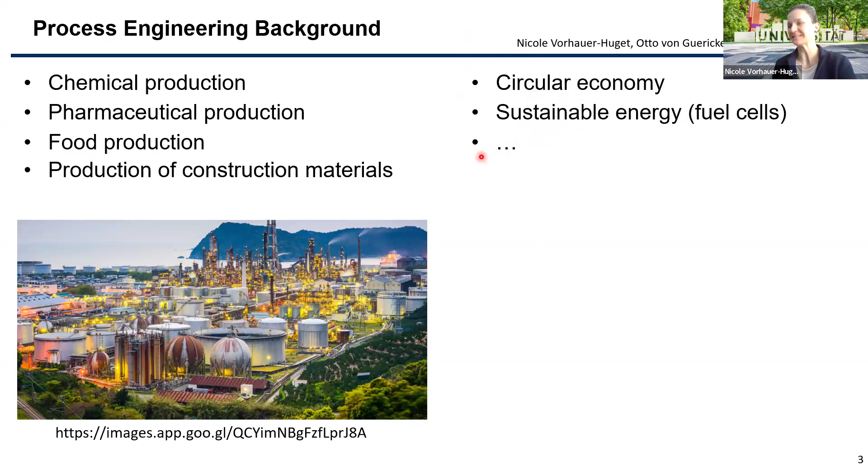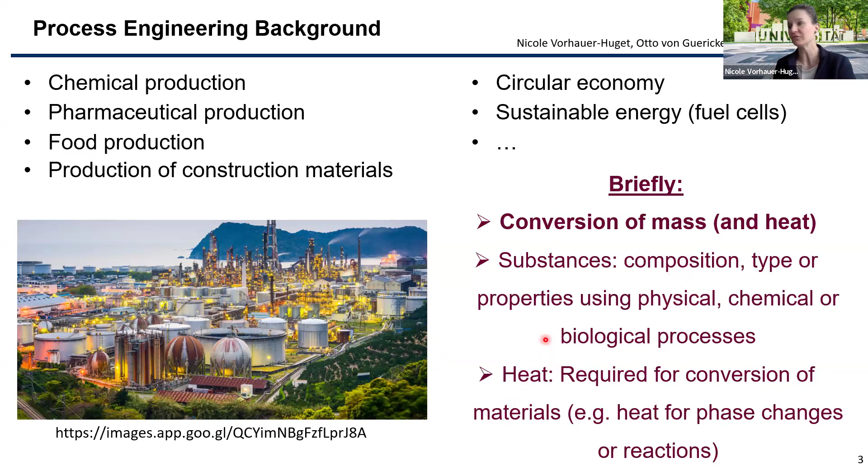One could briefly say that process engineering is actually the conversion of mass and heat. This means the substances, their composition, their type, their properties, is converted from one type into another type by physical, chemical, or even biological processes. And the heat is also converted, because usually we convert the heat into a chemical reaction or a phase change or something different. So this is process engineering - not that bad to learn it within a few minutes, I would say.

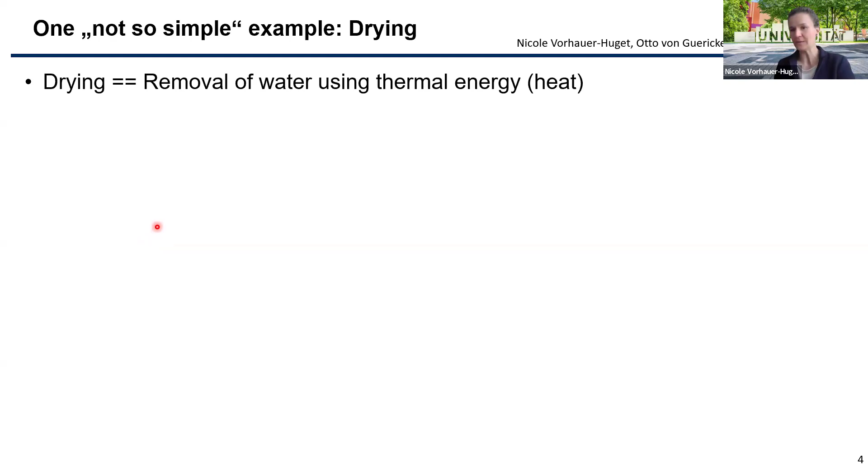Maybe to give you an example, which looks very simple at first sight but is maybe not so simple if you look a little deeper into it, is drying. Drying is the removal of water using thermal energy, using heat, and is something we experience daily - for example in the morning when we blow our hair to get it dry after a shower. This is the drying process, and here we use hot air to evaporate the water and transport it from the hair in vapor form to the environment.

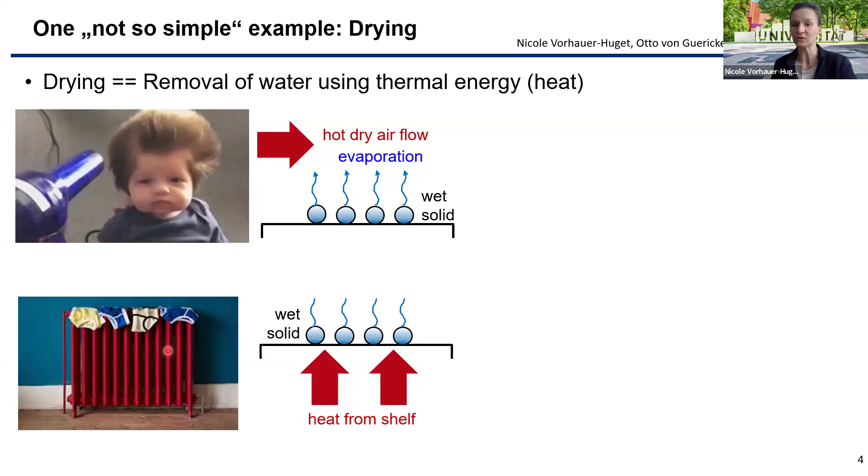And there's also drying, for example, of clothes - it's a little bit different heat supply. So when we use hot air with the hair blower, in the other case it's a hot shelf that transfers the heat to the wet solid for evaporation. So the conversion here is the phase change of water from liquid to vapor. I think this is easy to understand. The heat transfer here is by hot air or contact to a hot shelf to the wet solid, and the mass transfer is the transfer of the evaporated water into the surrounding.

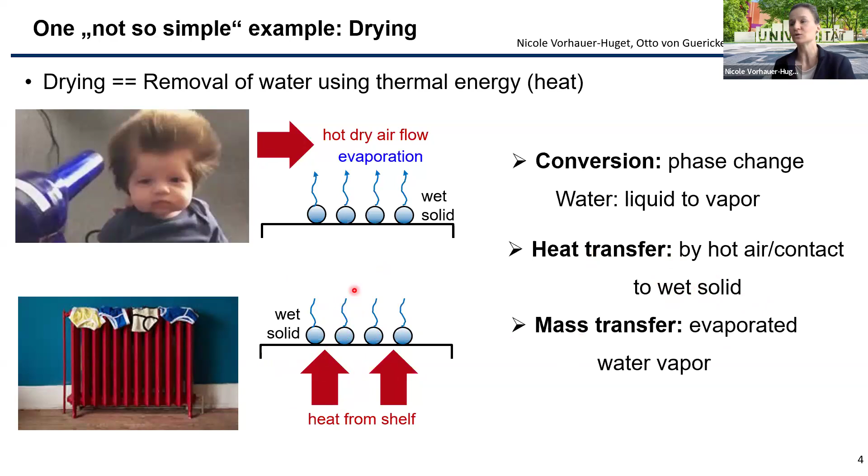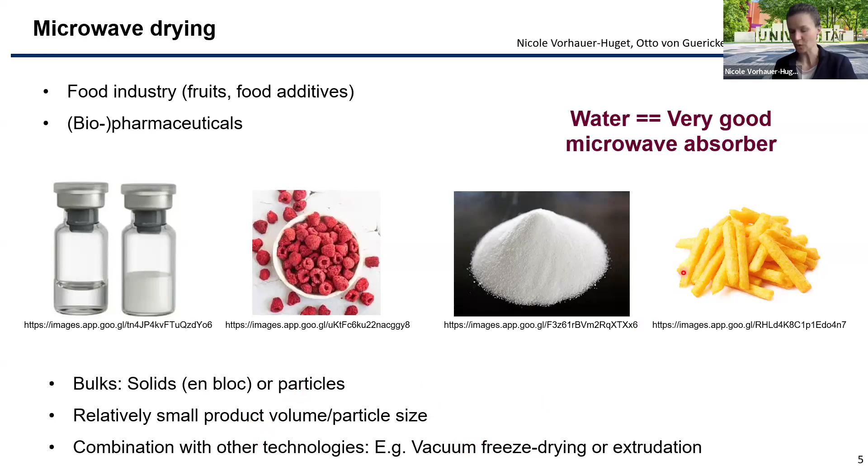So they can either be bulks - for example here in microwave freeze drying, the solids would be frozen en bloc. But it can also be particles that are treated - we can have relatively small product and particle size as the powder we see here, or we can even have a combination of this microwave drying technology with other technologies, for example in vacuum freeze drying, or in the extrudation process, microwaves could also be included to enhance the process.

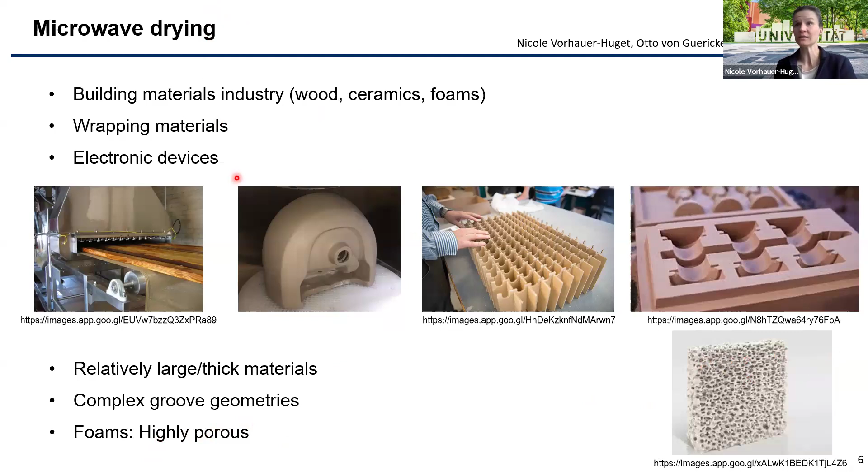So there are quite a lot of applications for microwave drying. Why is it so interesting to do research on that? If there are already industrial processes established, why are we nowadays looking that much at the application of microwaves? This has something to do with the European Green Deal, which has the high goal to achieve GHG neutrality in 2050. In Germany, we even put the goal to achieve this in 2045, and Bavaria in Germany even 5 years earlier. So this is very tough. For this, we need, of course, new technologies and new production pathways.

We can use renewable energy sources because it's actually an electrified process. This can decarbonize the energy supply. Due to the volumetric heating, we achieve a higher energy efficiency. This is what we understand as process intensification. There are other things that are even important, like better process control, different process conditions, tailored product properties. So this is motivating our research at the moment.

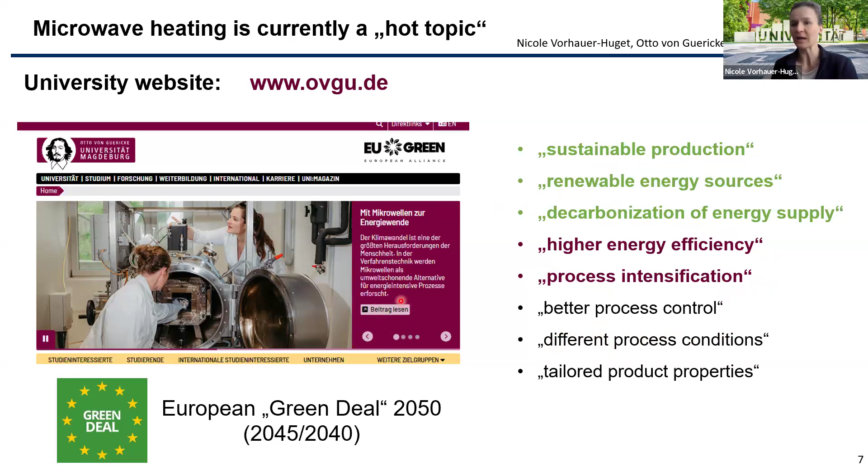Before we go into this research topic, to give you a broader understanding from the process engineering point of view, I would like to give some introduction to what is defossilization, what is decarbonization, and how microwaves are supporting the goals of the European EU Green Deal.

In the chemical industry, when we talk about defossilization or decarbonization, we usually talk about the material aspect. We would like to remove all the carbons, maybe the fossil-based products, and replace them with new sustainable products, maybe even recycled in the circular economy. But for microwave heating, I'm talking today about the substitution of energy carriers for process heat. This means that all the processes in process engineering applications, chemical production, and so on, need heat for the mass conversion. This heat is currently provided based on fossil fuels, but it could be based on electrified processes, and microwaves could be one option here.

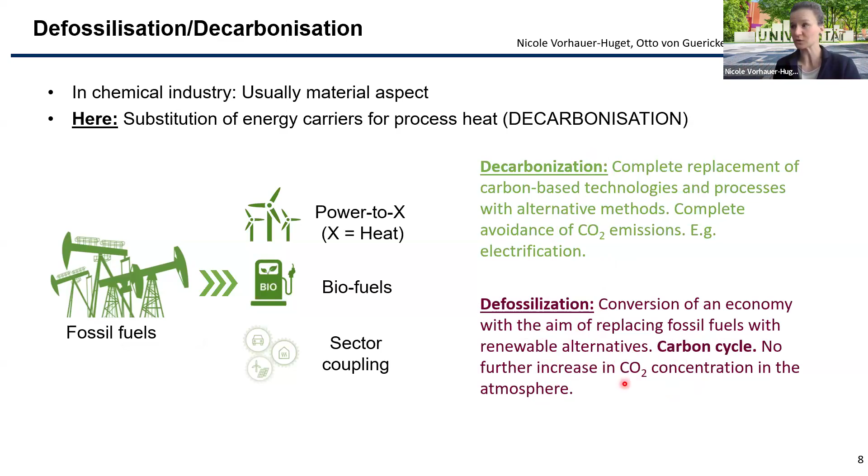To give the definitions here, decarbonization means we get rid of all of the carbons, all of the Cs, CO2, CO, and so on, out of the process. For heat supply, I think this is pretty much realistic, meaning we don't burn any fossil fuels anymore, and we base the heat supply completely on renewable or electrified energy sources. Defossilization, in contrast, means that we cannot remove the C from the processes. There's always some carbon. Many products in chemical engineering are based on carbon, but we recycle the carbon so that the CO2 concentration in the atmosphere is not further increased.

Energy is a very important topic. In Germany, at least in 2020, 19% of the total energy consumption was used for process heat. You can see here the industrial sector and the process heat—440 terawatt hours in 2020. By that time, there was only a very tiny part based on renewable energy sources, this green part here, and some part was based on electricity, but that electricity was not generated by renewable sources. So this is a very huge amount compared to the overall energy consumption in Germany.

When you look a little closer, you can see that most of the energy is used for processes above 400 degrees Celsius, so high temperature processes, but the processes at lower temperatures also have quite significant energy consumption. When I come back to drying, which takes place below 100 degrees Celsius, this is almost a quarter of the circle. So it's quite important to look at this energy consumption.

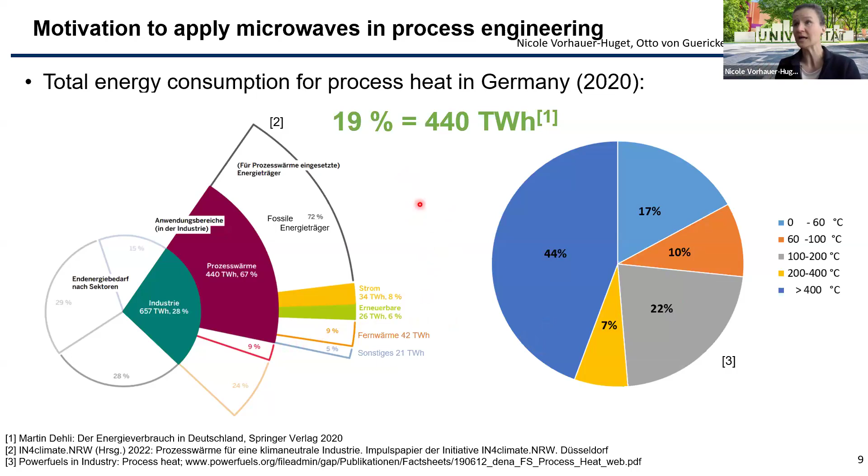If we are thinking about electrification of process engineering, and if we are thinking about GHG neutrality, then we cannot achieve this when the energy consumption increases. So what we have to do in parallel to the replacement of fossil fuel-based process engineering is to decrease significantly this energy consumption.

In Germany, there is the DECHEMA. It's quite a big organization for the chemical industry, and they have written a roadmap for 2050 because of the European Green Deal. They make some suggestions on how to reduce this energy consumption. Some suggestions I would like to read out here.

For example, it would be possible to substitute state-of-the-art processes by other approaches that are less energy intensive. Reduction of temperature levels would be one option where it is possible, though not always. The avoidance of heat loss through insulation - this is somehow obvious and is done where appropriate. The waste heat cascade utilization so that we also avoid too much heat losses along the process chain, or heat pumps, are other examples.

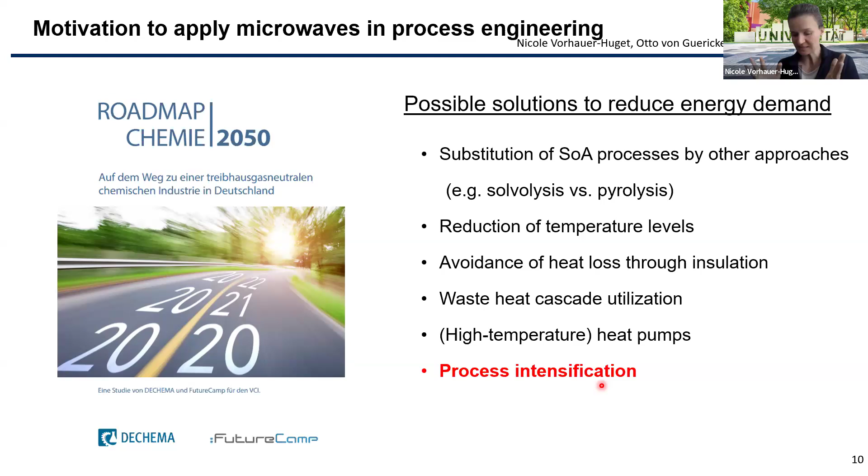One point I would like to highlight today is process intensification - making processes much faster with much higher throughput so that the energy required per kilogram of produced material is significantly reduced. For this process intensification, based on electrified technologies, there are 3 options mentioned in this roadmap because they are electrifiable.

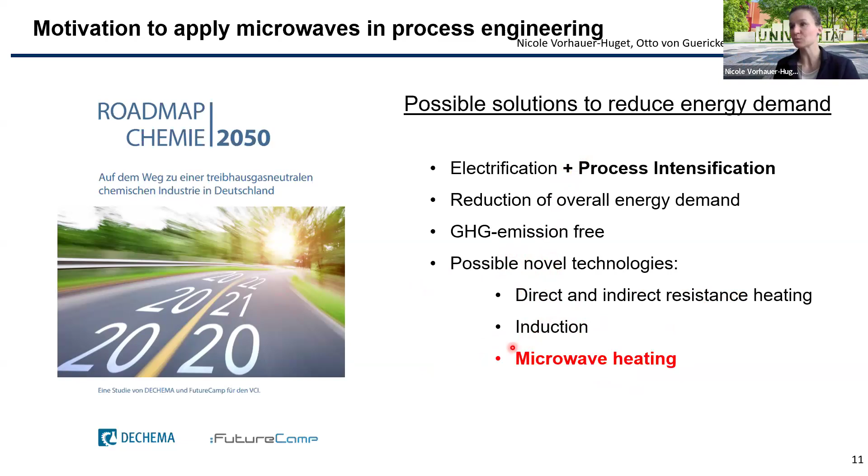This is direct and indirect resistance, so that means ohmic heating. This is induction, and this is microwave heating. I would like to focus today only on microwave heating for obvious reasons.

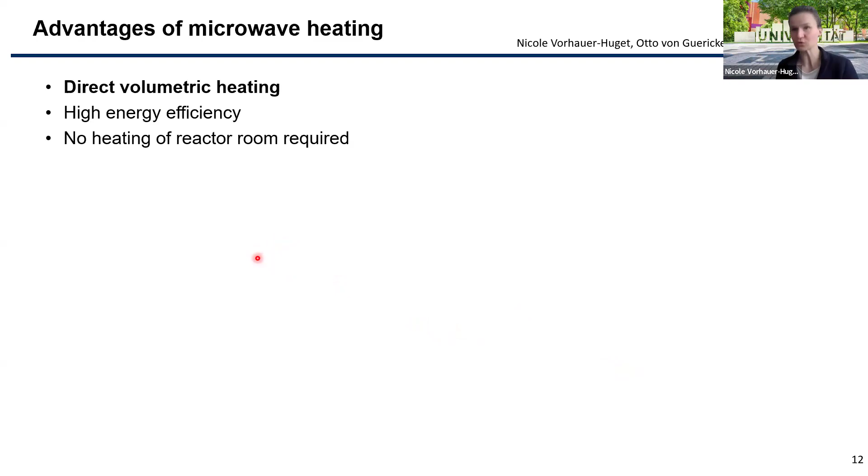What are the advantages of microwave heating? I think most of you know, but let me go through that quickly. You have the possibility for direct volumetric heating. Based on that, there's at least expected high energy efficiency, and only the product is heated - the reactor room or everything around it does not have to be heated. It has very high heating rates if the material allows that, meaning we can achieve reduced process time and high material flow rates.

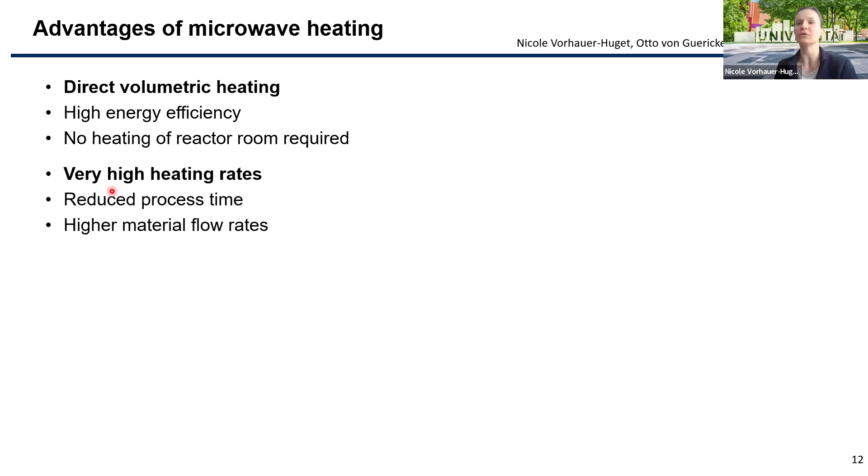For chemical engineering applications, it's also interesting that the temperature gradients are inversed. From home, you know if you heat something in the oven, heat is transported from outside to inside, so the temperature gradient is from hot surface to cold core, at least at the beginning. In microwave heating, it's the other way around - a hot core and a cold surface. This means reaction products produced inside a material undergoing a chemical reaction are transported in the opposite direction to the temperature gradient than in conventional processes.

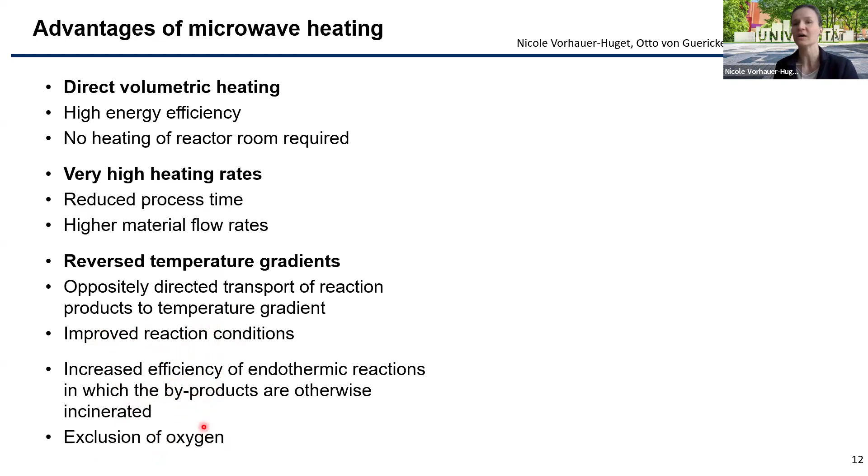This can result in improved reaction conditions. Also endothermic reactions in which byproducts are otherwise burned can achieve higher efficiency because the burning would not be necessary anymore. This would also mean we don't need oxygen in the process, which can have significant advantages for certain processes. I have put here some examples.

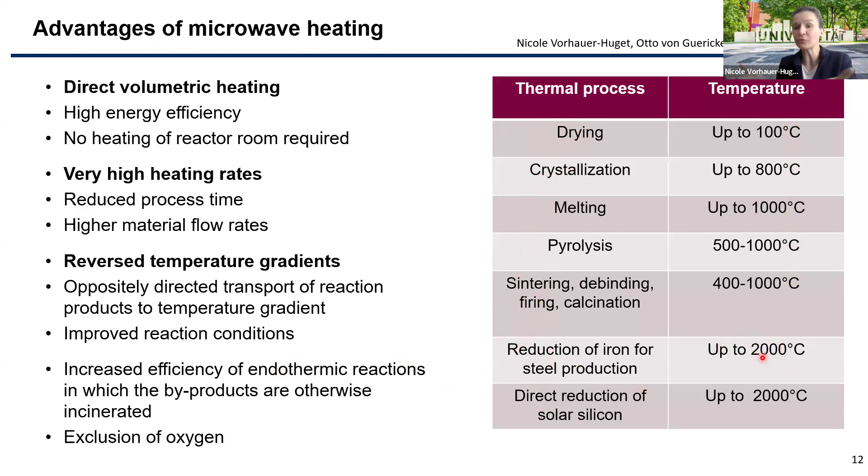For processes in which microwave heating can be applied, other than drying - about which we have talked already - other applications would be crystallization, melting, pyrolysis, sintering, reduction of iron, or the direct reduction of solar silicon. As you can see, the temperature levels at which microwave heating can be applied cover the full range of levels that I had shown you before, which is quite interesting.

But every process that has a list of advantages can also come along with a list of disadvantages. This is clear. For microwave heating, the disadvantages are the dependence of the heating efficiency and heating rates on the so-called loss factor of the material. This limits microwave heating for certain materials - for example, the pyrolysis of plastic with microwaves would be problematic, and very often susceptors would be required.

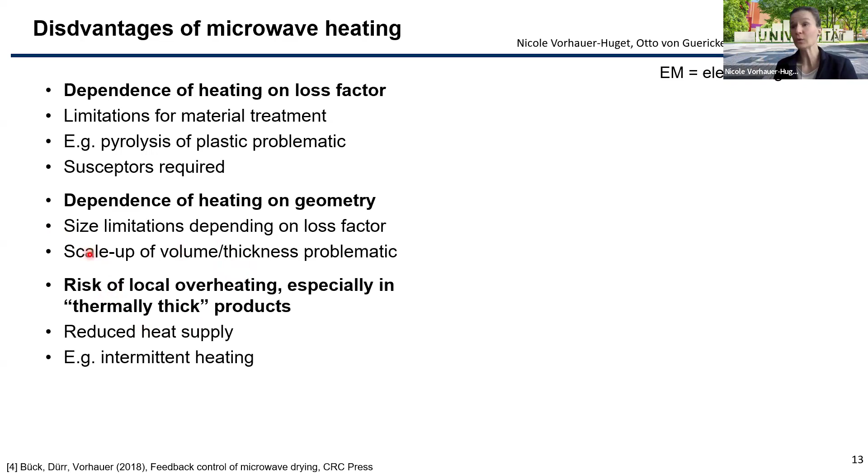The dependence of heating on the geometry is something I would like to point out clearly today - I will show you some examples. This can, of course, also lead to size limitations, and the scale-up, meaning increasing the product size from something small to something big, can be problematic. The risk of local overheating, especially in thermally thick products, is a big disadvantage.

I've brought here some image - this is a clay sample, and you can see the brighter parts in the center. They are dry, so there's no water anymore. The darker parts still contain water, and obviously there was local overheating because we have evaporated the water or pushed it out from these spots.

While the other parts remained wet, and this is of course a problem in process control. The temperature gradients are reversed—they're high in the center, and if the heat transfer is limited, this can be very problematic. Of course, the leakage of any EM field is also problematic, so the reactor design must take this into account.

This means from the process engineering point of view, it is not at all possible to use the apparatuses that are currently established and just equip them with a solid state generator or magnetron or whatever. It means that the complete design of the reactor needs to be renewed.

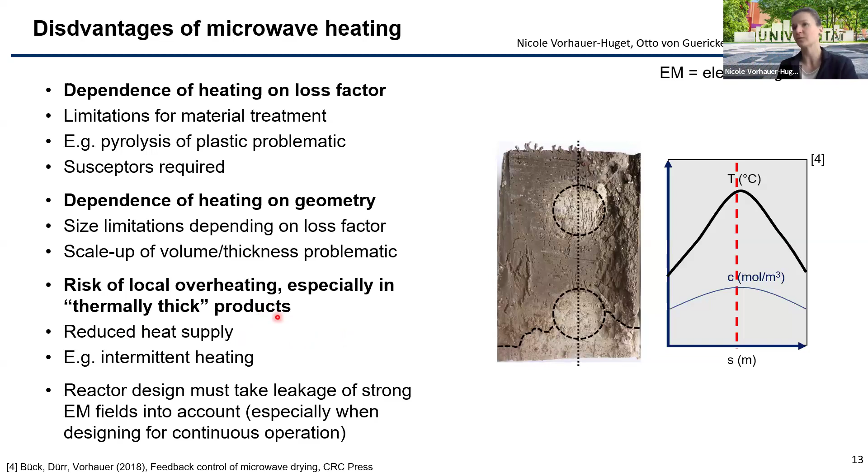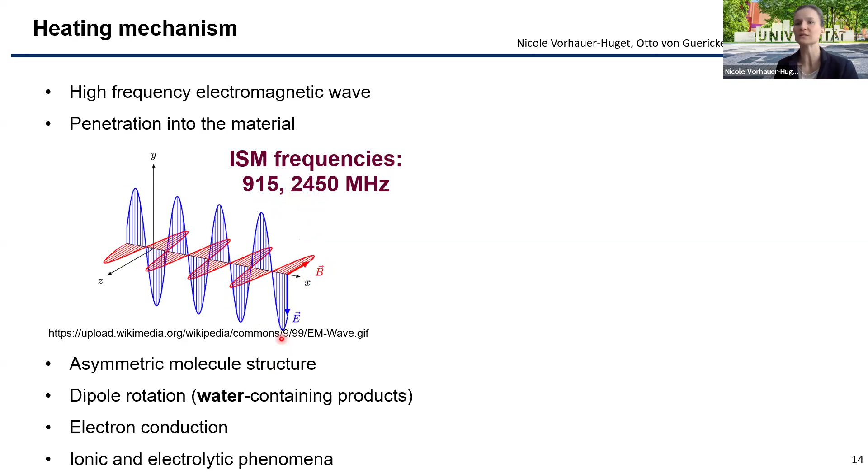Microwaves are high-frequency electromagnetic waves. What is interesting for the talk today is that we use only ISM frequencies, so industry, science, and medical frequencies, at 915 and 2450 megahertz in Germany. These are the allowed frequencies for processes. And of course, the heating is based, for water for example, on the asymmetric molecule structure.

So for the orientation polarization of the dipole, the dipole rotation of water, which is quite interesting for water-containing products, as for example in drying. It can also be based on electron conduction or on ionic polarization.

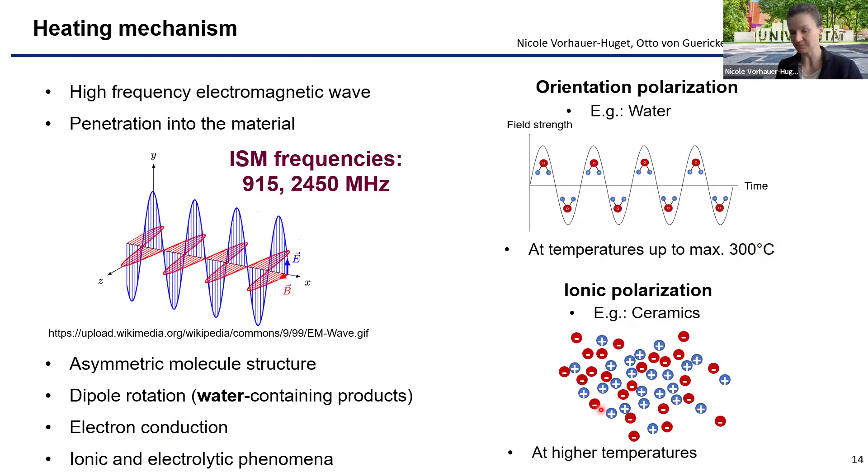Drying takes place usually at temperatures well below 300 degrees Celsius, so water is evaporated into vapor phase at this temperature. At higher temperatures, for example for ceramics, other processes start to play a role, and electronic conduction maybe. If we think about carbonization, for example, that can be done even at much higher temperatures. We will see later.

I would like to give you a very short introduction to the heat transfer condition, because this is important for understanding. In the conventional heating process, as realized in an oven operated with hot gas, we have heat transfer from the center of the hot gas to the surface of the solid. Then there is heat conduction, thermal conduction from the surface of the solid into the core of the solid, where the reaction, phase change, or whatever can take place.

We can calculate the transferred amount of energy with a very simple equation. K in this means the heat transfer coefficient, A is the surface area, and delta T is the temperature gradient between the hot side and the cold side, or between the hot spot and the cold spot.

As we have here a parallel or a series connection of heat transfer resistances, the K is also combined of the thermal conductivity in the gas phase, the heat transfer coefficient in the gas phase, and the thermal conductivity lambda in the solid.

What is important to understand is that the heat transfer coefficient alpha—coming back to this picture of hot gas drying—depends on the geometry of the material and the flow conditions of the hot air. The thermal conductivity lambda depends on the material property, the internal or intrinsic property of the material where we would like to conduct the heat.

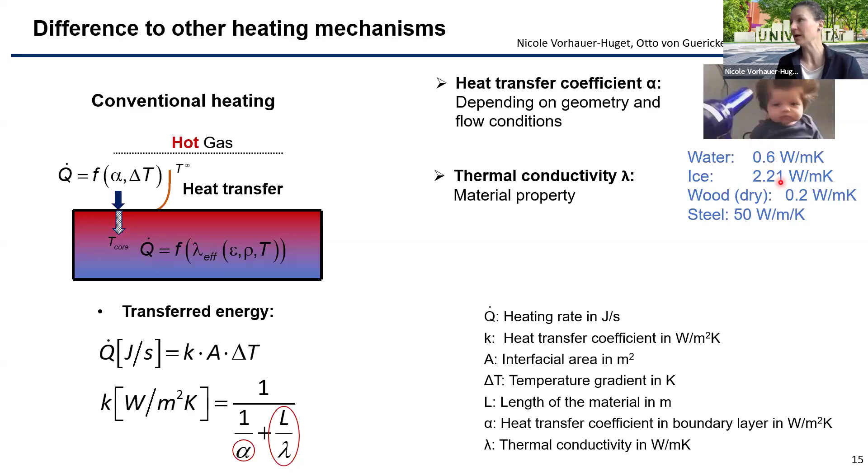There are big differences depending on the material. Water conducts heat not so well, while steel conducts heat very well. Additionally, the thickness of the material plays a role—the thicker it gets, the longer I need to transfer the heat from the surface to the center, so the drying time or heating up time will become longer.

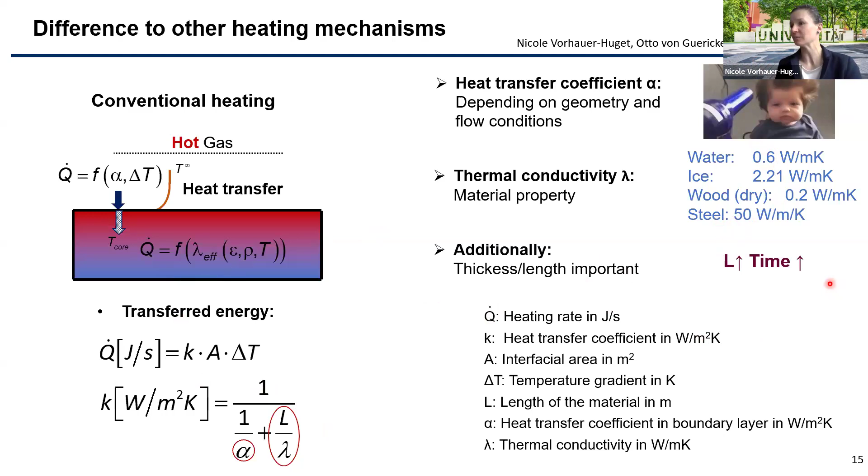This is what I would call the conventional heating. In microwave heating, the situation is much different. First of all, we don't need a hot gas as a heat source. We can have a hot gas, but it's not necessary because the heat is generated inside of the material, by dissipation of energy from the electromagnetic field.

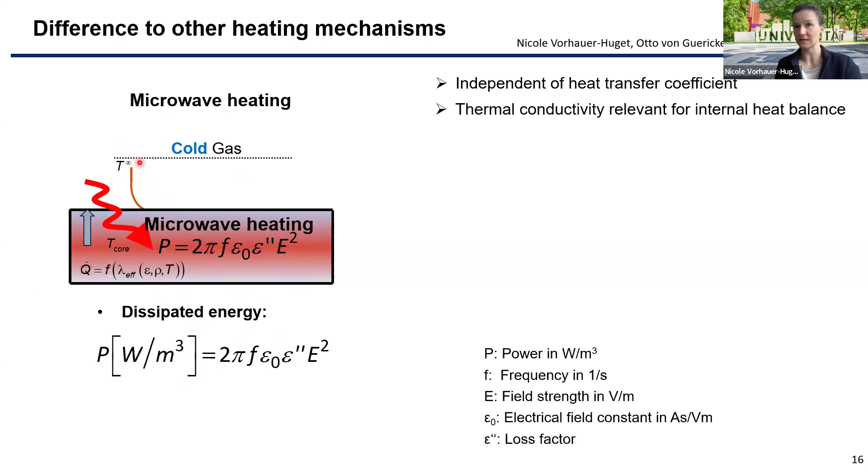The only thing that is now relevant for us is maybe the thermal conductivity inside of the material, because we have the heat generation in the center, and then we would like to conduct heat maybe also to the surface or wherever. But it's independent of the heat transfer coefficient at the surface—the thermal conductivity is relevant only for internal heat balance.

And then there can be a decision. From the engineering point of view, we like to use dimensionless numbers to make decisions much easier, rather than inventing new models for every problem, but to say, based on a very simple formula, I can decide is it useful or not. Here for microwave heating, at least in my opinion, it would be useful when the so-called Biot number, which is the relationship between the heat transfer in the surrounding and the thermal conductivity, is greater than 1.

And why do I say that? Because if the alpha would be bad, this means if you cannot transfer the heat through the gas phase to the surface, you could also use infrared heating, because the radiation of the infrared would not penetrate too deep into the material. It would just heat the surface, and this would be sufficient to overcome the alpha. But microwaves can penetrate deeper, and they can also reach the core if the lambda, so the thermal conductivity inside the material, is very low. So I would suggest using microwave heating when the lambda is small, even if you have a high alpha.

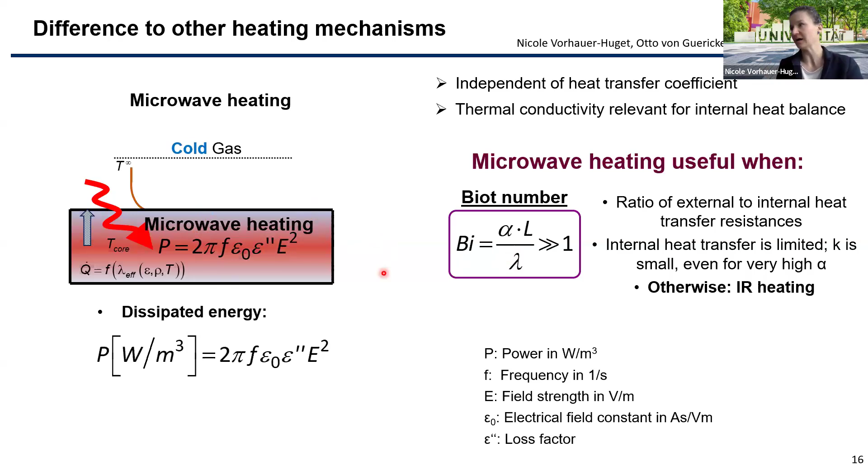And what is the heating based on? I think I don't need to explain this too much in detail in this community, but just to recall a little bit.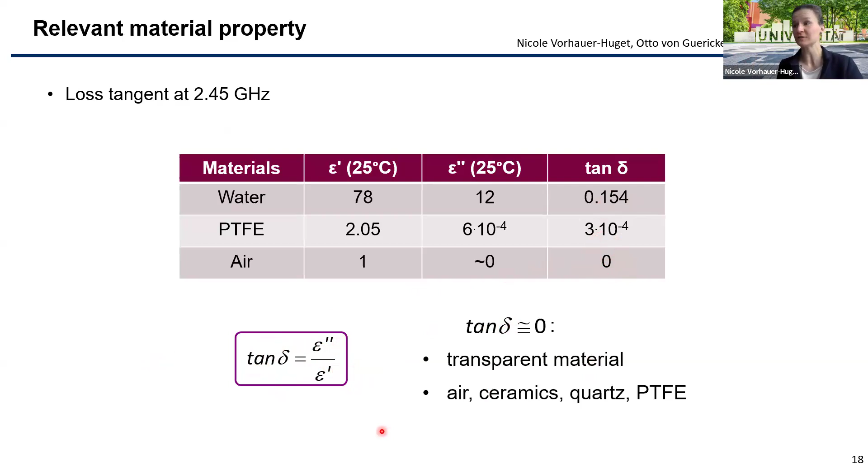I would also like to point out the role of the temperature. So not only the water content is important for the heating efficiency, but also the temperature. Different materials have a different dielectric constant or complex dielectric permittivity at different temperatures.

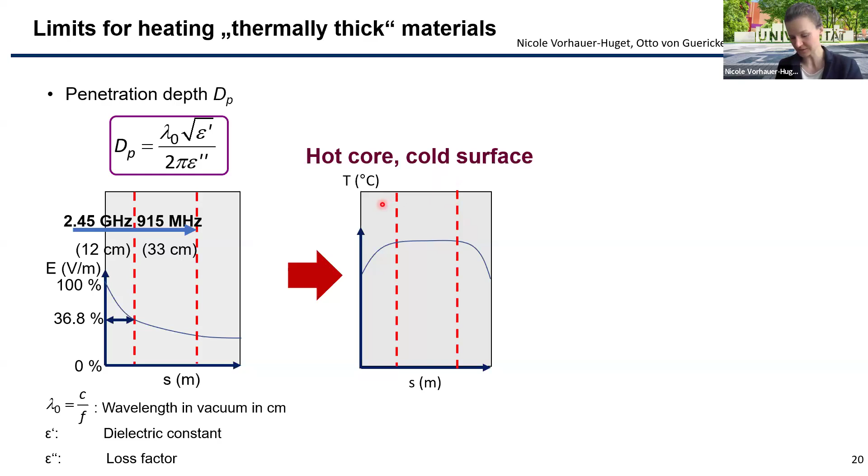According to this behavior, as I said before, we can have local overheating in the center, and if the heat transfer conditions from the location of the hotspot are not good enough, this can have a dramatic effect. For pyrolysis it wasn't that bad actually, since the conversion of wood into biochar or charcoal was our goal.

But for example, for this application here, this is a clay that we heated up to more than 1000 degrees Celsius, and we can see that the process took place only in the center. The rest of the clay remained almost untreated, and this is of course not a very good process design, because at the end the product quality is really bad.

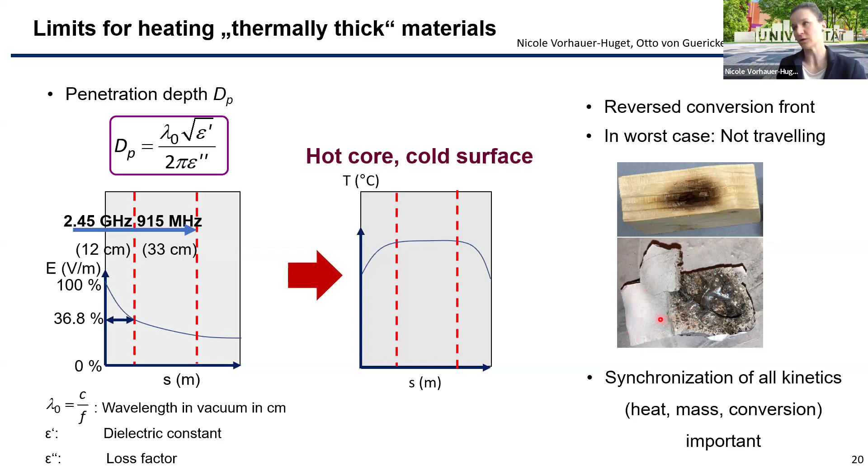What does the penetration depth do in other geometries, in what we call thermally thick materials? This is a facing brick, and I brought one here today so you can get an impression of what it looks like. If you look on the video, you can see me and this brick - a normal brick used for building houses.

We put this in a microwave and measured the temperature along this side of the brick, in the horizontal direction. For this measurement we used a fiber Bragg array, which I've also brought. I just need to take care I don't hurt myself with the laser light, and I'll put it into the camera so you can see the glass fiber with several points of measurement.

You can see everywhere the red points are - at these points we can measure the temperature very precisely across a long distance. So we put this fiber into the clay and measured the temperature. At the very beginning we had room temperature, then the clay slightly heated up, and you can see the temperature profile is not like the one I showed you before.

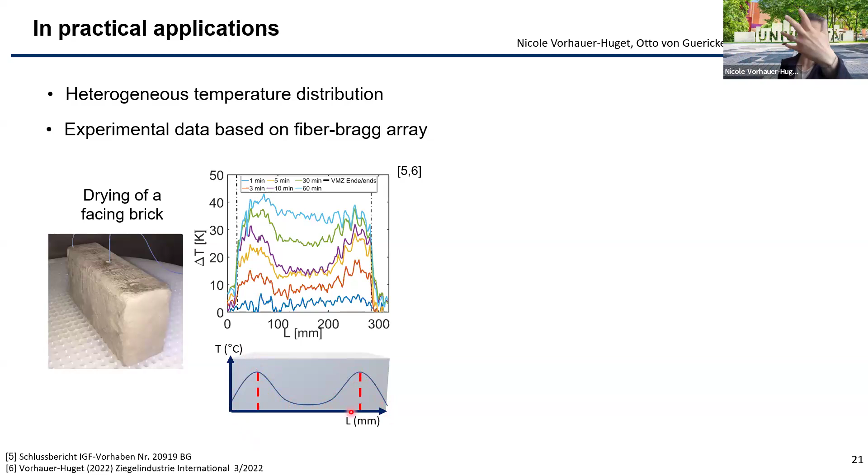This can also be simulated. I've brought some pictures of COMSOL simulation that we have done, again with the partners from Weimar. You can see here the electromagnetic field distribution. We don't need to look too much at the details, but what I'd like to point out with these images is that the geometry is important.

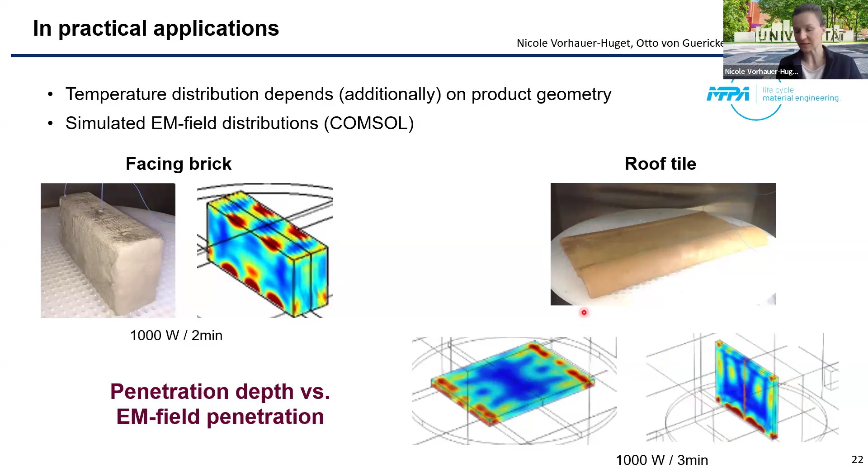The facing brick has a different geometry than a roof tile. And the roof tile, if I put it the same way into our microwave oven, flat on the plate, the heating is much different compared to if I put the roof tile in this other direction. This is related to the penetration depth again. The penetration here would be limited because the waves would come to the surface of the clay and then penetrate from there. If I put it vertically, upside down, the penetration depth, or the depth of the material, would be much smaller. So this is important for process design, or for the design of the reactor.

To show you how we do these experiments, I have brought a picture from our microwave dryer, with a small video here of this facing brick.

This dryer is equipped with 2 magnetrons. We are using microwaves and magnetrons at our institute that come from the side. We have a rotating plate here—you can see it's also rotating in the picture. There's also a so-called mode stirrer that is responsible for homogenizing the electromagnetic field in the cavity.

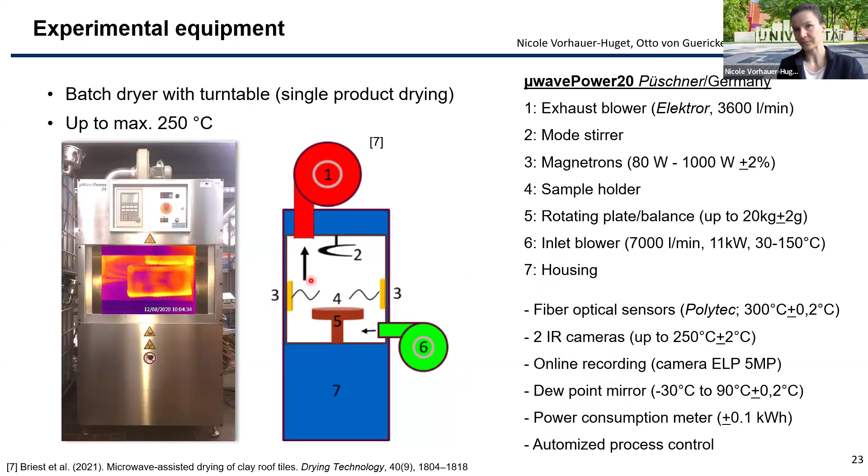For the drying purposes, it's very important that we have a blower, so that we have air supply and also air removal, because we are generating a lot of water vapor and this water vapor needs to be removed from the process room. We also have different other things installed: a balance, fiber optical sensors, IR cameras, online recording, a dew point mirror. This is important to understand the air humidity, what value it has, and things like this. So this is the microwave dryer that we use for drying purposes.

For higher temperature applications up to 1000 degrees Celsius, we have also a microwave reactor from the same company, Püschner, Germany. This is equipped with only one magnetron, but otherwise has almost the same setup—a turntable with a scale, a pyrometer. But here, because of the reactions that take place, it's very important for us that the container is gas tight, so that we can supply nitrogen to avoid, for example, oxidation or burning of the material, and things like this, with online measurement of the gases and so on.

So this is quite a small container, 20 by 20 by 20 centimeters. You can see here, it's a very special equipment that allows very specific processes inside it.

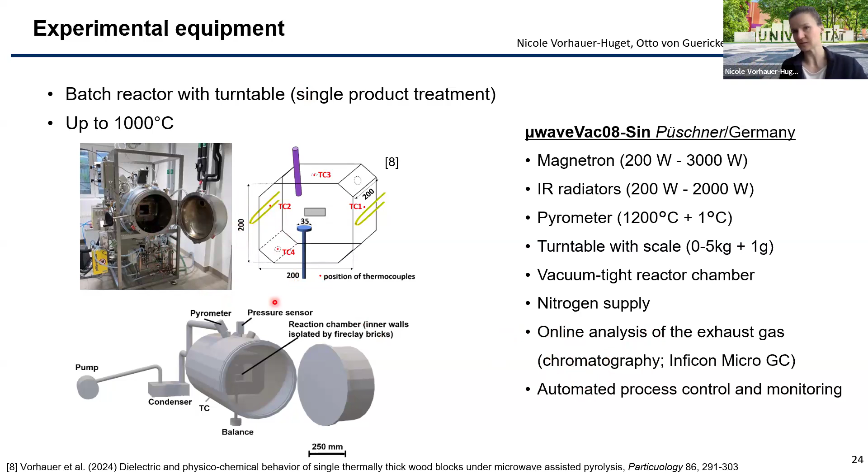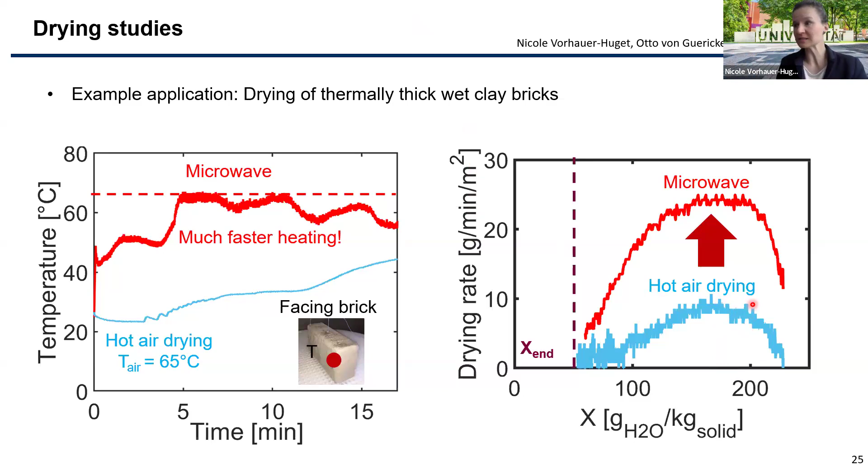On the other hand, I've plotted here the drying rate—grams of water removed per minute per square meter surface area of the material. This is also interesting because the drying rate increases: if I have a higher temperature, I can remove much more water within the same time period, and this makes the process faster and more efficient.

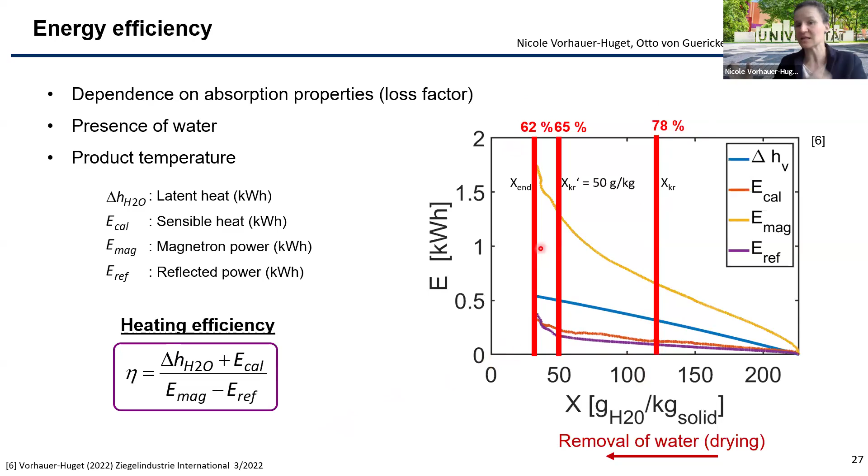This is important to understand or investigate, because if we would like a high process efficiency, we would not remove too much water, but in a drying process we have to go all the way. The question is whether there's a possibility to improve this process, for example by going to higher temperature levels or by applying intermittent heating.

We have also studied pyrolysis of biomass, pyrolysis of wood. The background is: what can you do with wood pyrolysis? It's the burning of wood in the absence of oxygen, a little bit different than the fire you might do in a garden or in a camp.

So this is heating under nitrogen atmosphere, and this has the purpose, for example, to produce biochar, which is a charcoal, to produce non-condensable vapors, and to produce bio-oil. The bio-oil later on can be further treated to achieve at the end a fuel, for example a biofuel for planes or aircrafts. And this can also be done with microwaves.

This was, from a chemical point of view, very interesting for us. I think the take-home message is that the microwave cavity is quite a black box, and in our case it was actually black because all the pyrolysis oils coated the walls at the end of the process.

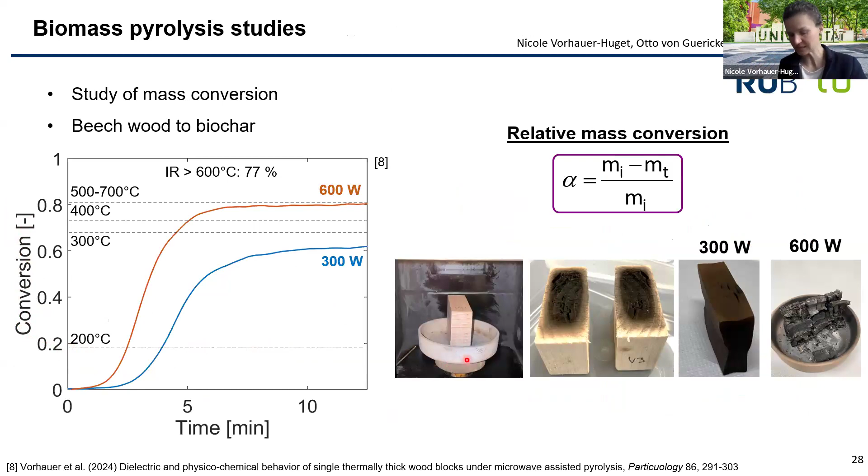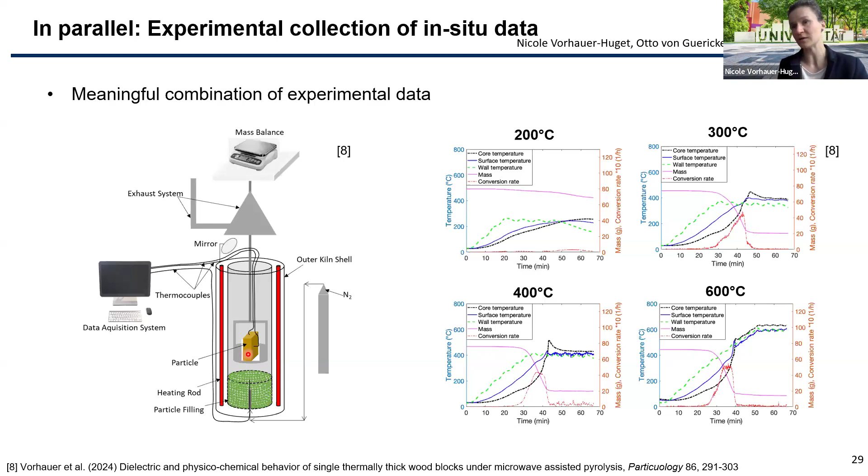And for all other situations where we are neither able to measure in a microwave nor with other setups, so for really unmeasurable data, we use simulation tools. This is something we do a lot at our institute, the development of mathematical models and simulation tools to investigate the processes on different scales. And what is most inaccessible is usually this pore scale.

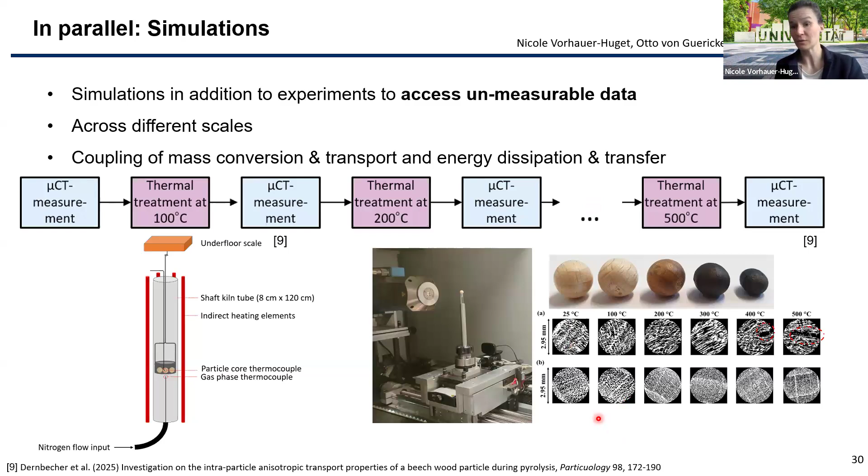So that we could image the tiny little micropores inside of this material. This is again important for us to understand the transport, the heat transport and mass transport conditions on that scale, because this scale affects at the end the above scale, the mesoscopic scale, and later on also the macroscopic scale. So all of this is interacting with each other, and that's why we really take care here of the details.

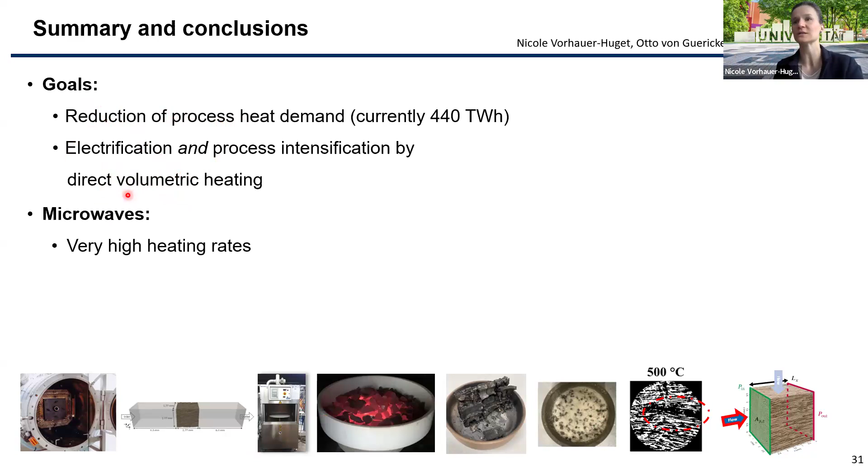Yeah, so I'm already at the end of my presentation. I started with the formulation of the goal that we are currently investigating microwave heating with the aim to contribute to the European EU Green Deal. This means we are interested in reduction of the process heat, so process intensification due to volumetric heating. At the same time, electrification to go from fossil fuels to renewable energy sources. And we have chosen microwaves here because they have very high heating rates.

We are not at the end of the research. There are a lot of things to do. We need to understand how we can prevent local overheating, for example with intermittent heating cycles, and how we can also control the energy dissipation for the different geometries we are treating—particulate material, solid bulk, or even very volumetric materials—and maybe even couple this with other technologies.

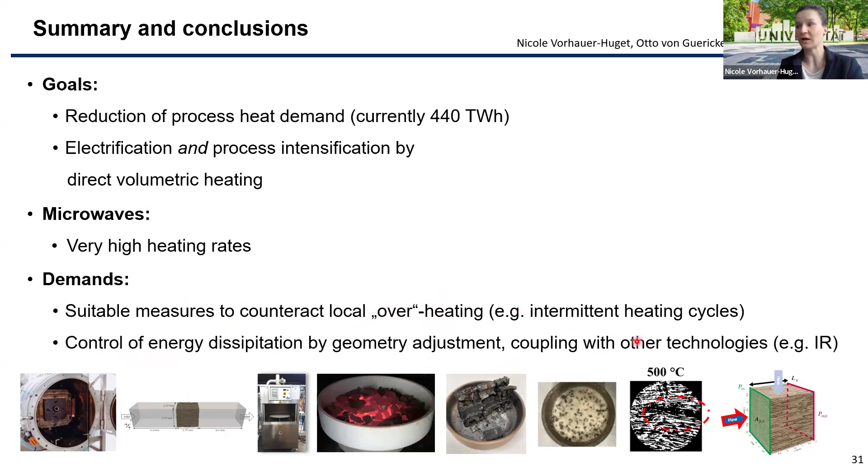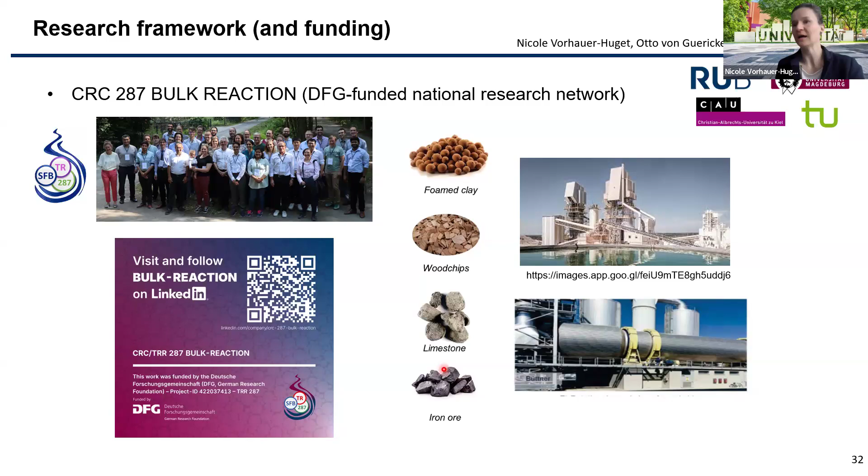So this is the current research that is going on. This research takes place in the frame of the CRC bulk reaction, which is in Germany a DFG-funded national research network with partners from different universities: the Ruhr University Bochum, Otto von Guericke University, the Christian Albrecht University in Kiel, and TU Dortmund. Of interest are high temperature processes that usually take place in really, really big kilns at very high temperatures. If you are interested in this topic, you can scan this QR code and visit our website or our LinkedIn profile.

And with this, I would like to thank you for your attention. I would like to thank the national funding sources, the DFG, for example, as well as other internationally based funding. And I would like to thank, of course, the PhDs of my research group who are contributing here to the work. Thank you.